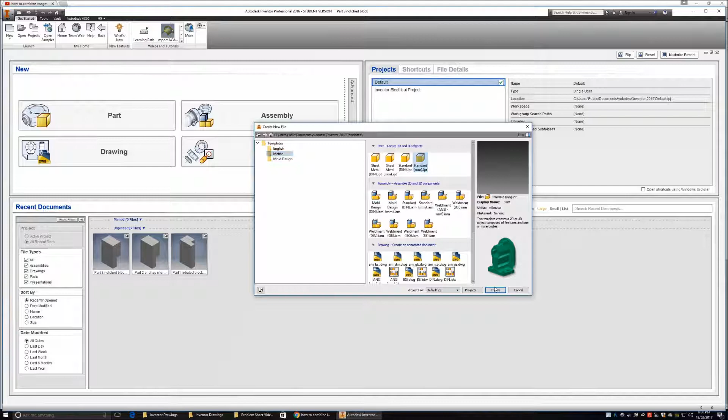We've got our working sheet now, so we're going to start a new sketch, same as what we've done in the first 3. We're going to select off plane, and select the XZ plane still. It doesn't matter what plane you pick for this situation.

In the past we would have gone and got the rectangle tool. This time I'm going to grab the line tool, up top left hand corner, click on it. If you look at drawing number 4, you'll see it's sort of like an upside down T, so we're going to draw an upside down T.

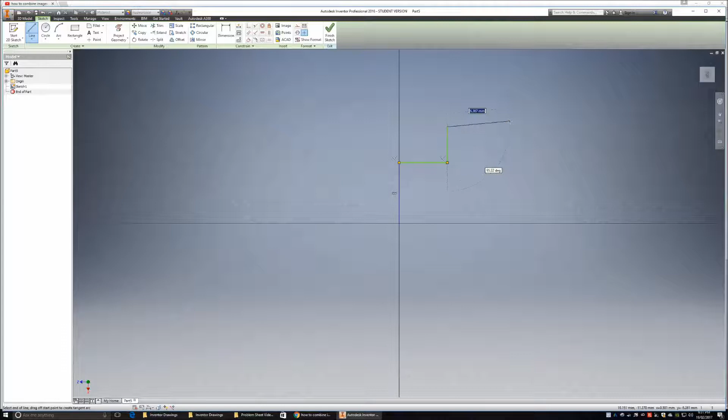All I'm doing is making sure I've got right angles. I'm not worried about what size things are. You can see I'm dragging it down, it clicks to a right angle, come down. I've got a guideline showing me it lines up about the same as the other side. Come into a right angle, and to a right angle, and to a right angle, and back to our origin.

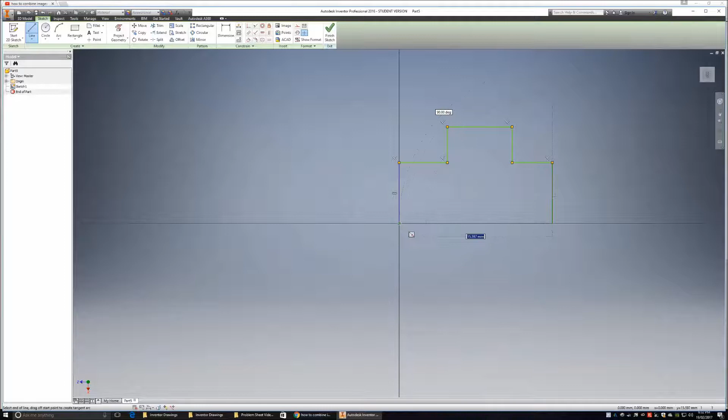Now I know my shape is the right shape, I just also know it's the wrong size, so this is where I'm going to use the dimension tool. I'll go up to the top ribbon, and you'll find the dimension tool under general dimensions.

Click on it, and now I'm going to click on one side, the other side, and drag down the bottom. Looking at my drawing, I can see it has to be 30, so I'll click on it, double click on it, type in 30, and hit enter. That's the first part done.

I can see the height from top to bottom, so I'm going to click on my little box at the top right hand corner to zoom out, so I can see my dimension from the top to the bottom. Click, drag out. My drawing tells me it's going to be 20, so type in 20.

So I've got my height, I've got my width. Now what other dimensions does it tell me? I also know that this part here and this part here are going to be 10 millimeters wide.

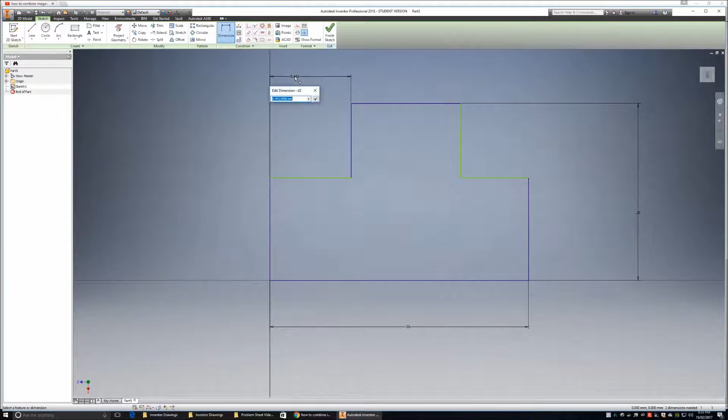If I know that's the size, I can click on one wall, click on the other side, drag up, tell it to make it 10 millimeters, enter, and it will. Repeat the same on the other side: drag it up, double click, 10, enter. The last thing it leaves me - as these lines get dimensioned and fixed, they turn from green to blue.

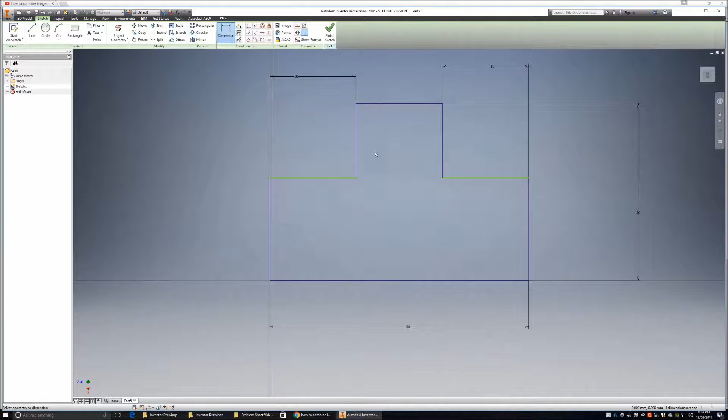That lets me know I've done those sizes. So the last one is from this side here to there, or I can go from here to there. Looking at my drawing, it's telling me the size between this side shelf and down there. So I'll click on that one and the bottom one, drag it out, and it's saying 10.

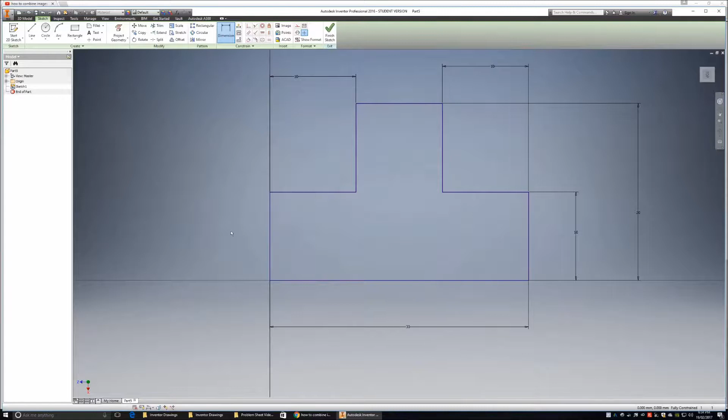You'll also notice that because I set up these two as on the same line with the guideline, it's changed both of them, and they'll both move at the same time. If that didn't happen, I'd have to come back over here, grab that one, and put the 10 out this side. Now I have my shape, I have my sizes, I know it's correct to my drawing, so I'm going to finish my sketch.

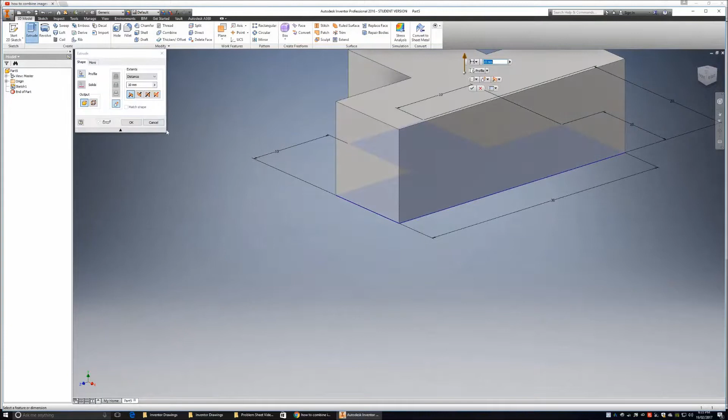So far so good, same as what we've done before. Now we're going to extrude. Extrude is up in the top left hand corner, click on it, and our length this time is 50, so type in 50 in the length, go enter.

Click up on our little box to center it, click top. There you have our block as in our drawing.

So now we're happy with our size and our shape, we're going to go and save it. We go up to the big I icon at the top left hand corner, come on down, and go save as.

This one is part 4, and its title is Tongued Block. And save.

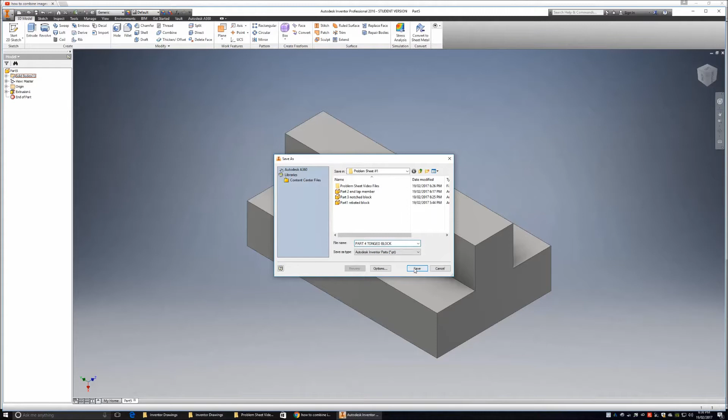So we had a new drawing technique this time, and we've introduced you to a couple of new features, one of them being the dimension tool, showing you how we can just draw the shape and dimension it from our drawing and then extrude it without having to cut anything away.